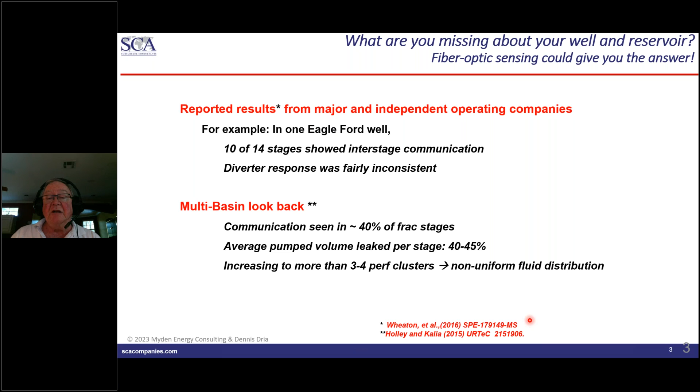With the studies that are reported here in these references that I've shown, we'll get many responses, but well, we pump plenty of water and sand. If we just pump more, we should be able to get our well stimulated, get our fractures going. But I will counter that by saying, if you always do what you've always done, you always get what you always got. A quote attributed to Henry Ford when looking for ways to improve his operations.

We'll end up showing a few examples where value has been realized by actually trying to understand what your processes are doing, how you are actually accomplishing what you set out to accomplish. In learnings from the monitoring during these fracking operations that have been applied to new wells, in the Eagle Ford they found a 121% increase in EUR and a significantly lower decline rate. In 2 wells in particular, they increased the average EUR in 2 wells that were producing 1,000 barrels a day.

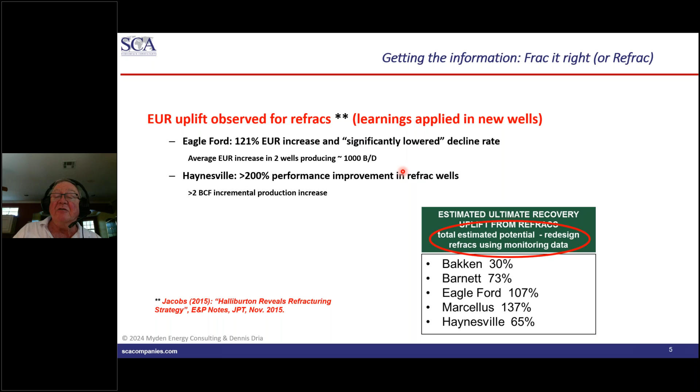So using monitoring data to redesign frac. So not just value in the wells that you're monitoring, but taking that information and moving it forward to use it in future wells. The reported results from several major and independent operating companies show that they had significant value in understanding and optimizing individual well performance.

The greatest value was in learnings that they were able to apply in new wells and often in new fields, where they were able to use the information they got to calibrate their models, and then use their updated models to more efficiently place and complete their new wells in these fields. They were able to optimize the hydraulic fracture stimulation efficiency, reduce cost, and stimulate more stages using basically the same operating costs. They increased the reservoir understanding, and that led to greater ultimate recovery.

So I've shown a few references here. It's somewhat difficult to get information from specific operators released, but one example that we have is from BP and Lewis Energy and their instrumented wells. They used distributed temperature sensing, distributed acoustic sensing, and pressure and temperature gauges. So the DTS and DAS are fiber optic monitoring techniques. They combined that with microseismic, and were able to get a better understanding of the physics of the production from their reservoir, and use that information to calibrate the models with the data and learnings.

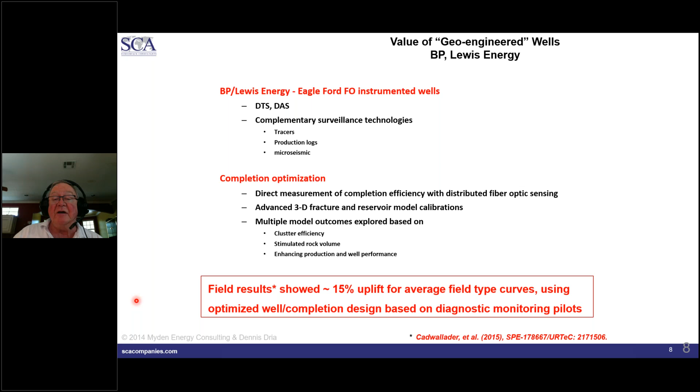were able to realize enhanced production. The field results showed a 15% uplift for the average type curves using the optimized completion design based on these diagnostic monitoring pilots. What they have shown is the type curve from their baseline well in the blue here, and this uplift. So not only an increase in the instantaneous production in terms of barrels of oil per day in the red line, both in the data and in the fit decline curve, but an increase in the total volume uplift.

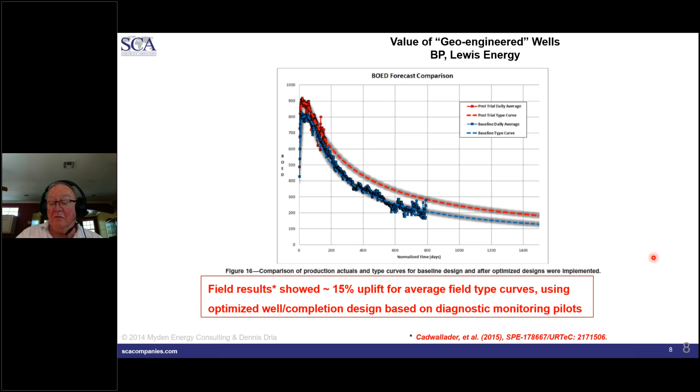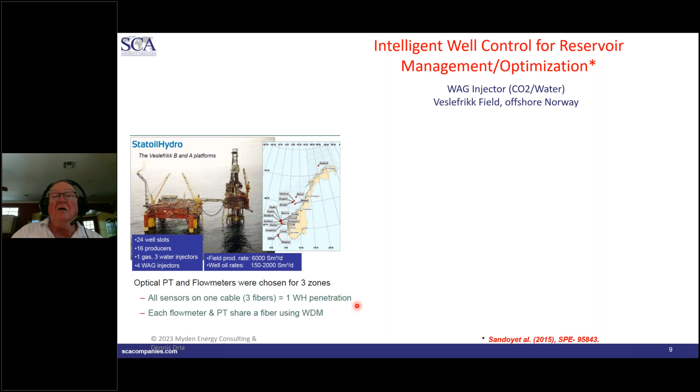An example from an offshore reservoir in the North Sea. In the Norwegian sector of the North Sea, there was a WAG injection, water alternating gas injection of CO2. The injection was into multiple zones, and they installed optical pressure temperature gauges and optical flow meters so that they could understand if they were properly controlling the injection of water into these three zones. The reservoir management goals that they realized were that they were able to get real-time pressure, temperature, and zonal injection rates, without any interventions. They were able to look for cross flow in the zonal injections and confirm that they had zonal isolation.

The value that they realized is that on this platform, they were able to save 1 to 2 well slots, which, since they were able to do that by optimizing their injection, allowed for additional producing wells to be drilled. At the time this was done, back in, I think, 2013 or so, the well cost was about 10 million each, incremental with the infrastructure they had in place. They would eliminate one injector, but also the frequent wireline logging. And being able to replace the wireline is a very significant savings in cost.

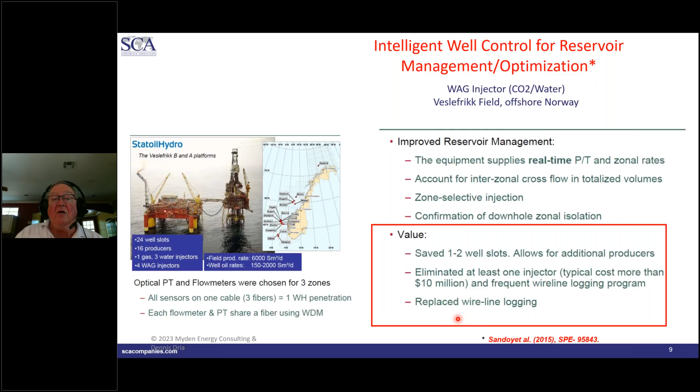So how is this done? There are three basic types of sensors that we look at in fiber optics. One is where there is a single point sensor, and the fiber itself is basically used as a communication line. There is an optical sensing element, and this is one which has absolutely no electronics. It's very small, very low mass, so it's going to be resistant to damage from vibration. Don't have to worry about solders and other effects of temperature. So a light pulse is transmitted down the fiber from a surface instrument. It interrogates this optical transducer, and then that information is returned through the fiber to the surface instrument unit.

It's possible, with many types of these sensors, to multiplex 8 or 16 of these on a single fiber. It's very valuable and very precise. An example of this is going to be a pressure temperature gauge that can replace a high precision quartz gauge for things such as pressure transient, or lower accuracy gauges that would be used for monitoring sweep or things like that.

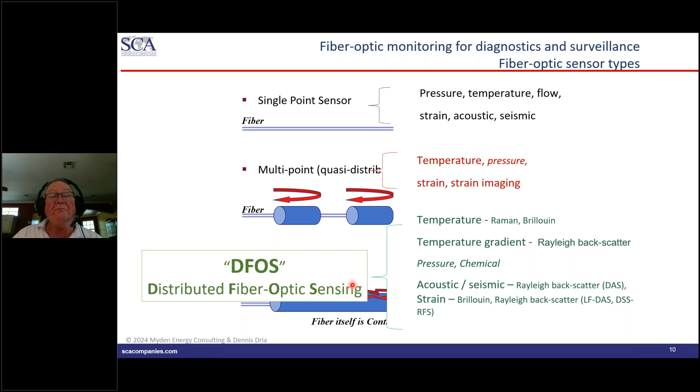Now, how do you make these measurements? Basically, it involves having to get a fiber or a cable containing the fiber into a well, and these cables on the outside are going to look very much like an encapsulated electrical cable that you might use for a traditional downhole pressure gauge. And they are placed in approximately a 1/4-inch OD stainless steel tube, corrosion resistant tube.

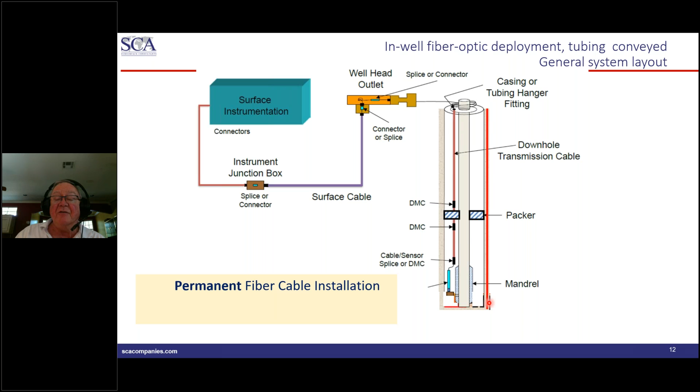There are also options to cement the cable on, or apply the cable to the outside of the casing as it is being run in, and then cement it in place. These are both examples of a permanent cable installation: the case where the optical cable is clamped to the tubing, and the case where you have the cable clamped on the outside of the casing as it is run in and cemented in place.

There are also ways to apply effectively a temporary installation, if you will, by doing an intervention. So very much like you might be doing a wireline or a coiled tubing intervention into a well. And the fiber can actually be conveyed on the inside of coiled tubing. So there are quite a few service companies that are offering an instrumented coiled tubing.

It can be done during an intervention. So it's quite possible to actually do coiled tubing work, a workover using an instrumented coiled tubing. And while you're in there, you can get additional information using the fiber optics. And I'll show some examples of those in later slides.

There are fiber optic instrumented wirelines, also slicklines, and then a relatively new commercial product is actually a disposable fiber, in which bare fiber is deployed into the well and then it is left in place. Data can be acquired from anywhere from a few hours to a few weeks, and then you basically take your equipment away from the wellhead, and the fiber is just left, basically like a strand of hair left in the well. There is nothing to pull out.

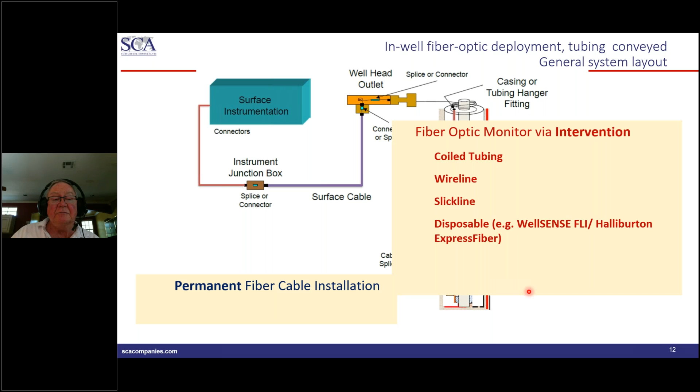With the installation of optical fibers, either permanent or as an intervention, we are able to provide basically life of well type of monitoring and information flow. So this notion of one fiber, multiple applications over the lifetime of the well. You've got a variety of different data streams or information streams that you can obtain depending on where you are in the well. You can use it during the construction and completion of the well.

This is very commonly done in the unconventional oil and gas world, where the fracture stimulation stage is monitored very closely using fiber optics, and you can identify such things as operational issues, do fracture profiling, and look for cross-well communications.

Starting during the completion through the production stage, through the lifetime of the well, if you have a permanent installation, you're able to do things like microseismic monitoring and vertical seismic profiling, to get information about sweep if you're doing an injection, and microseismic monitoring in injection scenarios, looking at injection out of zone and things such as that.

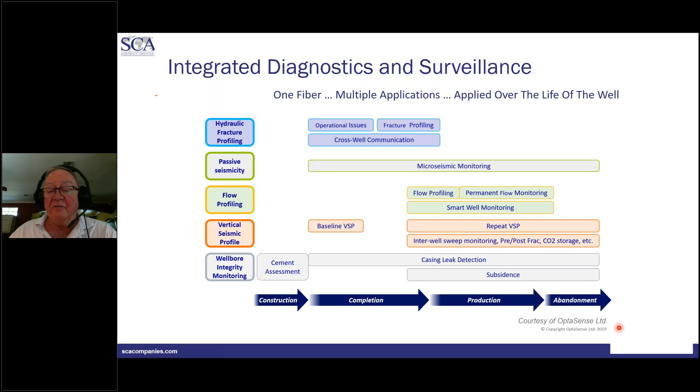These advantages of permanent monitoring also become important in CCUS, the carbon capture projects that are starting to be placed and monitored closely for leakage, as well as for reservoir management of the CCUS process.

For hydraulic fracture stimulation optimization, DTS and DAS have been used with other monitoring data to calibrate or constrain models. I show here a log panel from a publication from Gustavo Ugueto and colleagues, in which they show the results of monitoring from a single stage. The perforation clusters are shown here, and these are the stimulated stages.

This is a gamma ray in the first track, and then the depth track. There is a compensated neutron log. There were tagged proppants that were used to identify the placement of proppant during this hydraulic fracture stimulation. And we have a temperature log from the DTS, which shows some results from warmback. And then we have the distributed acoustic sensing panel here.

So we're trying to stimulate these zones, and there actually is some stimulation that was hopefully done a little bit lower. We don't see any significant results. And then integrated with this are the production logs showing the fluid velocity log and the resulting production profile that was obtained from that.

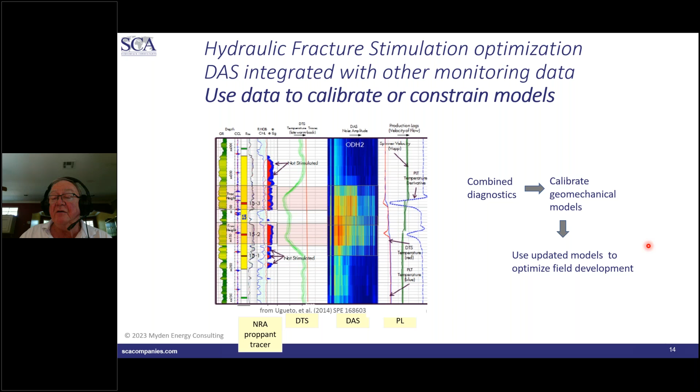So this was a very large economical incentive for doing the process, the improvements that they'd seen. One of the interesting aspects of the monitoring was using the DAS during the stimulation to evaluate how effectively they were able to frac in each of the perf clusters. This was a combination of the distributed acoustic sensing intensity during the stimulation, and then detailed strain monitoring that was done during production using a Rayleigh frequency shift type of distributed strain sensing.

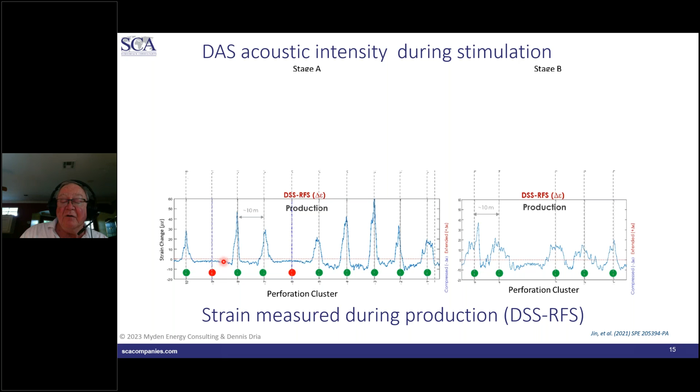And you can see that there are significant strain changes at each location that are noted in green here. We got this very nice prominent strain peak in every single one of these. The ones that are red have absolutely no strain change at all from production to shut-in.

And then overlaying again the original DAS from stimulation, we've extremely good agreement between what we thought was stimulated and an indication that there actually has been significant production and pressure drawdown at that particular perf cluster. And likewise, each of these ones that we claimed that we had stimulated are now indeed showing results of production and the near wellbore drawdown when the production is occurring.

So again, being able to integrate the results, substantiating production after a production time period with what you thought you had stimulated, and having extremely good agreement. And again, this worked into the validation of the updated models that they were able to use.

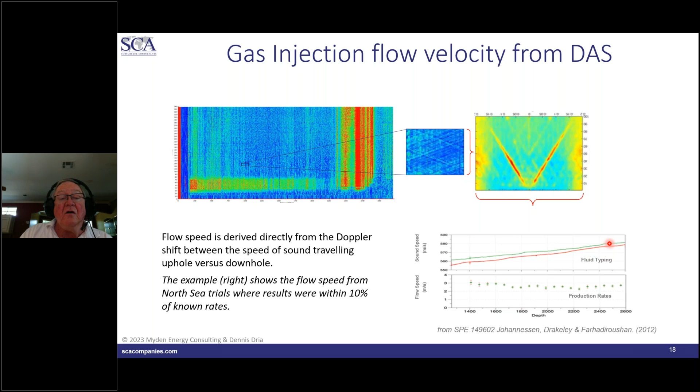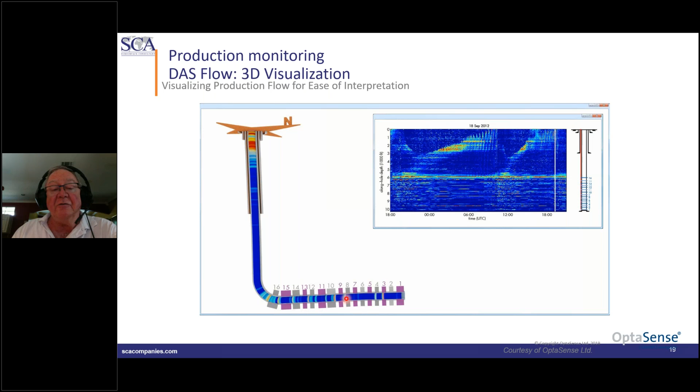And the formation that is above the injection formation is undergoing a steam flood, a thermal flood. So they will shut in injection for a short period of time. The water in the injection tubing heats up. Then when they restart their pumps, they've got this hot water slug that flows down, and they basically time the position of that slug as it goes down through the well, and they use that to calculate the velocity of the fluid.

It basically becomes a DTS, a distributed temperature sensing type of equivalency to a spinner log. So they get an injection profile. After the first pilots, they found that they had advantages over radioactive tracer fluid injection logs, much more accurate measurement of their injection profile, and they found that they were able to eliminate running spinner logs with this,

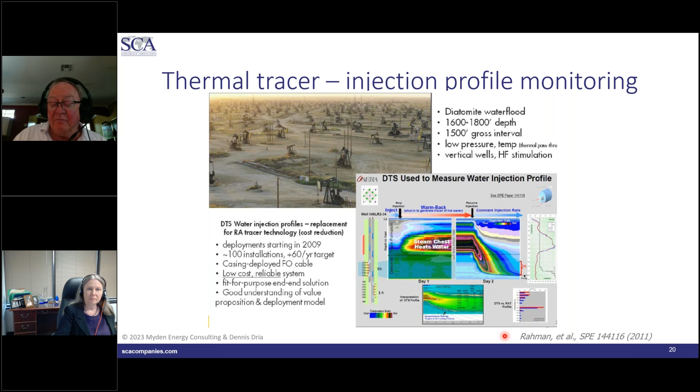They were able to take advantage of drilling a large number of wells, so they basically could do this as a fiber optic deployment factory, if you will, and came up with a low-cost and very reliable system. I think the added cost in their wells was something like $60,000 or less per well. So a very good result. This is explained in detail by Mahmoud Rahman, at that time with Aera in California.

For injection monitoring, when you are watching for an out-of-zone injection, we have an example from an onshore water disposal well. We had DTS behind casing. The shale log is basically plotted here. And the notion is that they want to do a lot of injection, but they want to make sure the injection is contained in this one reservoir unit so that they do not fracture up and they do not get any flow into any of the shallow aquifers, the potable aquifers.

Let's see, I know that I'm getting short on time.

I'll go through this, but what they were able to do was to show that after about a year's time, they were able to contain the injection even as they started a fracture. They were able to show that the fracture only grew up to this capping shale here, and the DTS satisfied the government regulations of having to pull the completion and do temperature logs to look for out-of-zone injection every year.

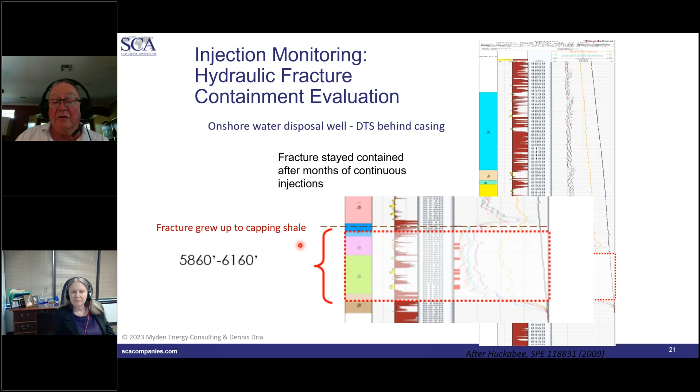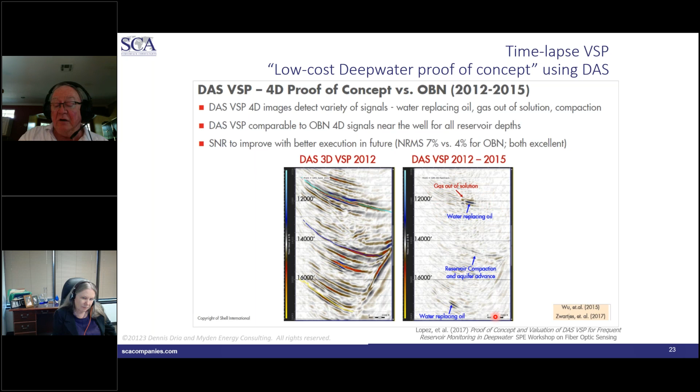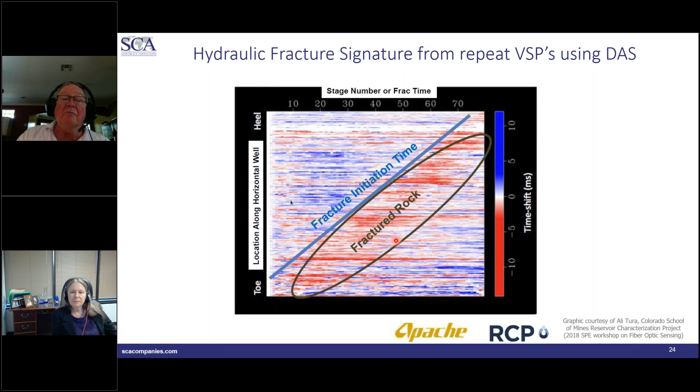The use of distributed acoustic sensing for 4D VSPs. You can make a 3D VSP measurement. This is from a deepwater reservoir in the Gulf of Mexico, work done by Shell, I believe, at the Ursa platform in the Ursa field. We see the VSP from 2012, and they did another one in 2015. This shows the results of the difference between 2012 and 2015, and they identify water displacing oil, gas coming out of solution, and so on. So extremely valuable information. Likewise, time-lapse VSPs in the stimulation of unconventional wells, being able to see where you have fractured rock.

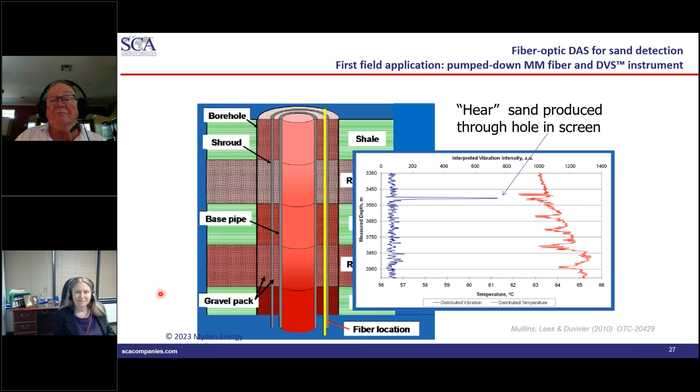So likewise on the sand... Dennis, I think we're going to have to wrap up. We're at the top of the hour. Okay.